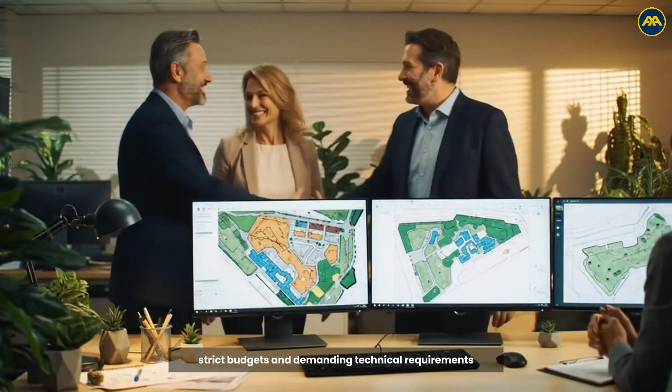In outsourced civil engineering projects, balancing speed and quality is always a major challenge. Tight schedules, strict budgets, and demanding technical requirements often lead to cutting processes or bypassing controls. The core issue is not choosing which side is more important, but building a system and work culture that allows speed and quality to advance together. Process discipline is the shared DNA of these two factors.

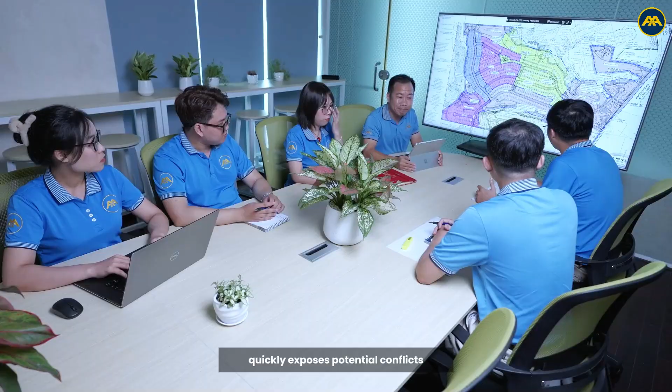The starting point is clarifying expectations and defining quality. Creating a stakeholder matrix that records each party's mandatory requirements and their weighting of speed versus quality quickly exposes potential conflicts. When these tensions are surfaced and addressed from the outset, all parties can agree on a clear concept of good enough. This consensus forms the foundation for avoiding compromises on quality during execution.

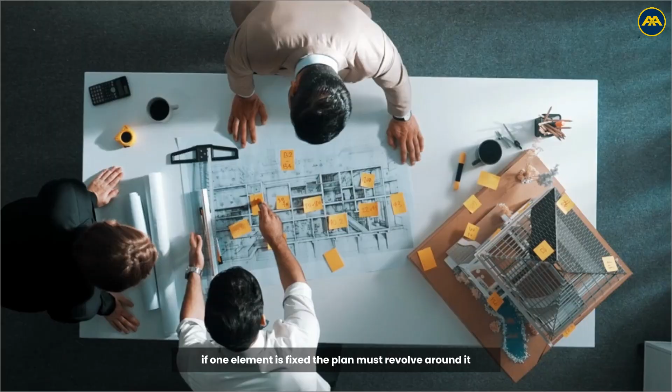In addition, the iron triangle of scope, time, and cost needs to be defined before the project begins. If one element is fixed, the plan must revolve around it. When the entire team, from the client to the outsourced engineers, understands the boundaries, guesswork stops and creative solutions emerge within real constraints. This approach makes it possible to shorten schedules without sacrificing quality or cost.

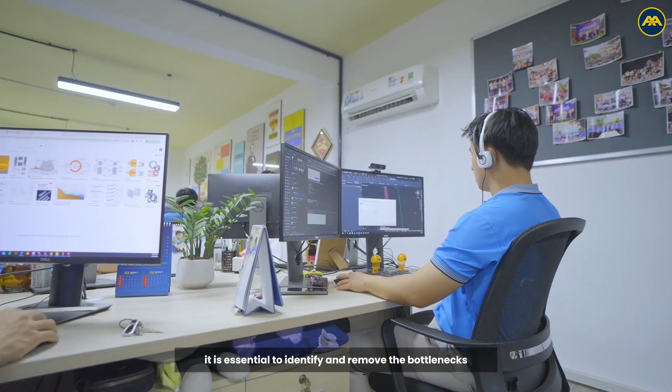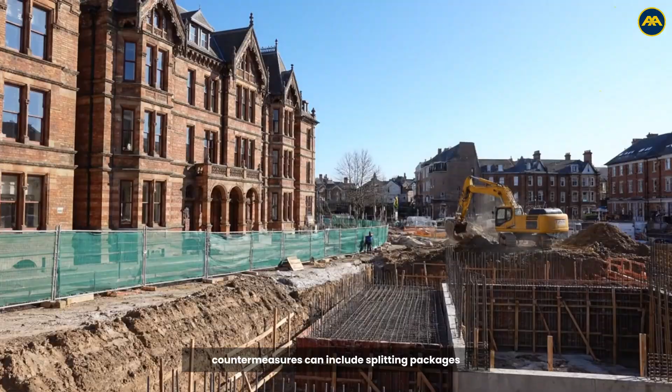To truly achieve speed, it is essential to identify and remove the bottlenecks in the workflow. Analyzing the sequence of tasks to find the activity with the highest waiting time and then focusing resources on that point yields far greater impact than simply adding manpower. Countermeasures can include splitting packages, running approvals in parallel, or starting procedures earlier when risks are manageable. This is how schedules can be shortened intelligently without extra staff.

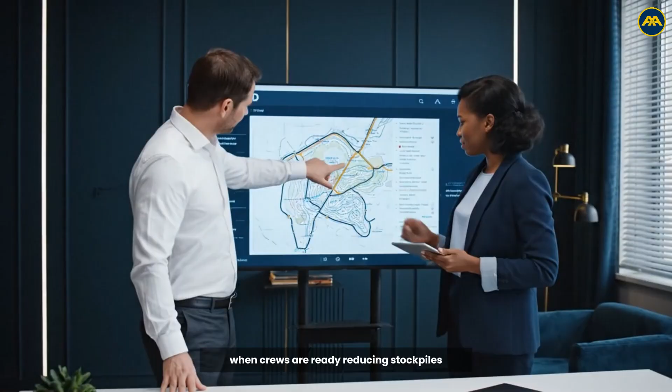Lean principles also play an important role in reducing waste and improving quality. Instead of flooding the site with all documents and materials at once, information and resources are provided just in time when crews are ready, reducing stockpiles, limiting damage, and focusing effort on critical tasks. The Last Planner System creates frontline accountability through weekly readiness checks to ensure materials, documents, and potential conflicts are resolved before work starts. This process minimizes rework and increases transparency.

Technology strongly supports this process. BIM detects design conflicts before construction. A cloud-based snagging application enables issues to be recorded and tracked for resolution in real time. Automated checking tools compare mix designs or material certifications with the project specifications and flag non-compliance before work begins. This proactive quality assurance clearly benefits both cost and schedule.

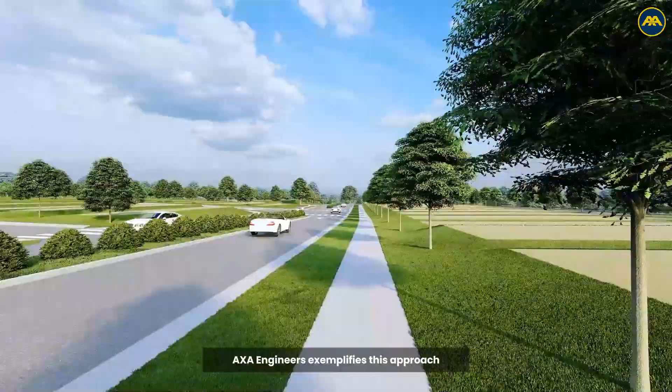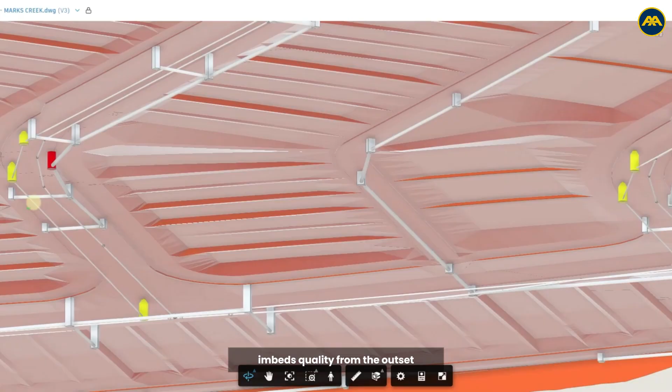AXA Engineers exemplifies this approach. AXA Engineers has built a philosophy of high performance and happiness through a comprehensive employee development program, creating a motivated, stable team of engineers trained to international standards. AXA Engineers integrates Civil 3D, BIM, and other advanced tools into every workflow, embeds quality from the outset with a Kaizen mindset of continuous improvement and transparent operating procedures. This culture and system make it possible to accelerate schedules while maintaining quality and compliance.

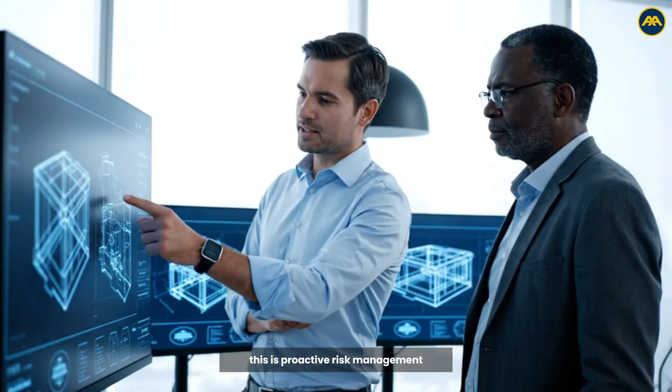Shortcuts that undermine durability, such as mass increases in manpower, prolonged overtime, or shortening concrete curing time, often backfire. Instead, public contingency buffers are built into the critical path as a shock absorber for unexpected tests or material issues. Being transparent about these buffers builds trust and maintains alignment. This is proactive risk management, not reactive firefighting.

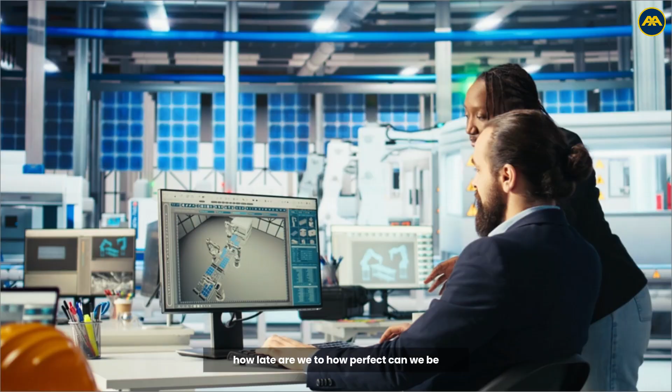Culture is the final differentiator. When key metrics are published and first-pass approvals are celebrated, the mindset of the entire team shifts from "how late are we" to "how perfect can we be?" When speed supports quality, both metrics rise together.

Speed and quality are not opposites but complementary factors. With the right systems and methods, it is possible to meet demanding schedules with confidence that all standards are still being met. This is the approach AXA Engineers applies to help outsourced projects become more effective, faster, and more sustainable.